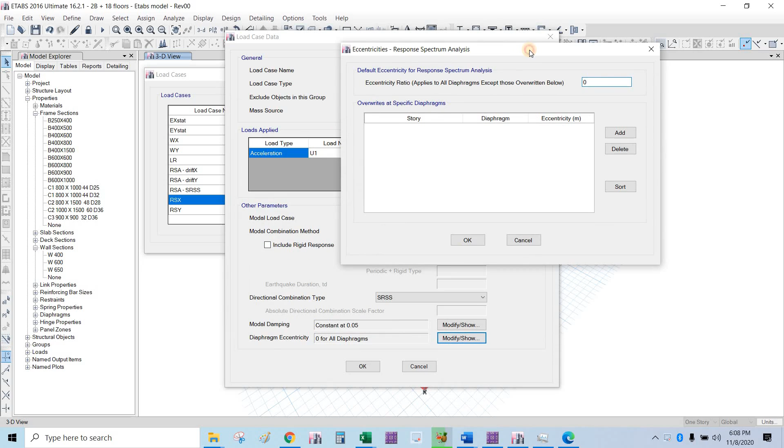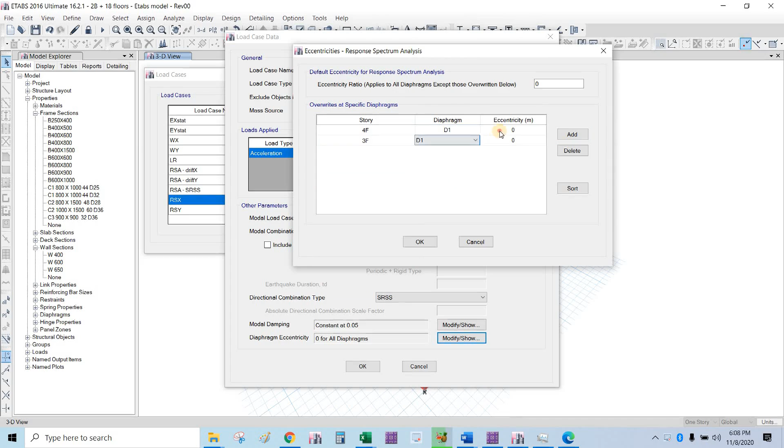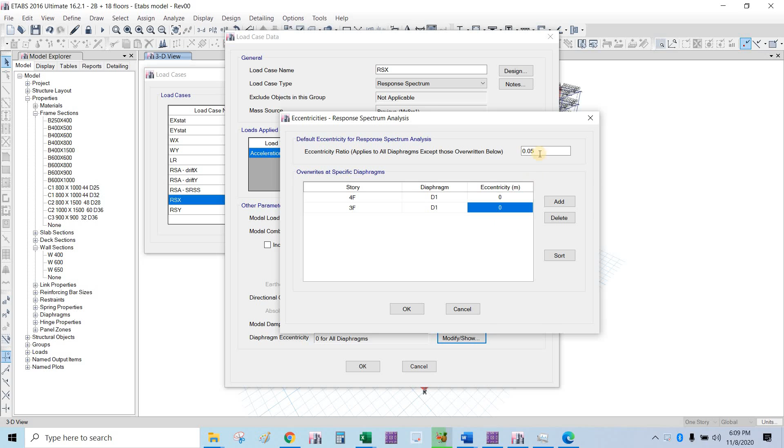So here we will put which floor, let's say 3rd floor to 4th floor, that's what we will amplify. So this is 0.05. Eccentricity ratio applies to all diaphragms except those overwritten below. So this is 5%. So if you have a value here, it means it's an exception, so the value becomes different.

For example, what I'll do here is the 3rd floor and 4th floor along X, just to show how it's done. So let's say this is 1.2 - torsional irregularity exists. Then let's say this is 1.21 - torsional irregularities exist here.

Then my AX needs to be more than 1 for this to be 5% above. Let's say here I'll make this 10. Let's say this is 21. More than 1 now. Then I already have a value here of 3.64.

This is the formula. Let's say this is small, 35 or 31. That's 5.9. So let's increase this more so the eccentricity at the 4th floor becomes bigger. Let's say 25, so 9%. Then this AX should not be more than 3.

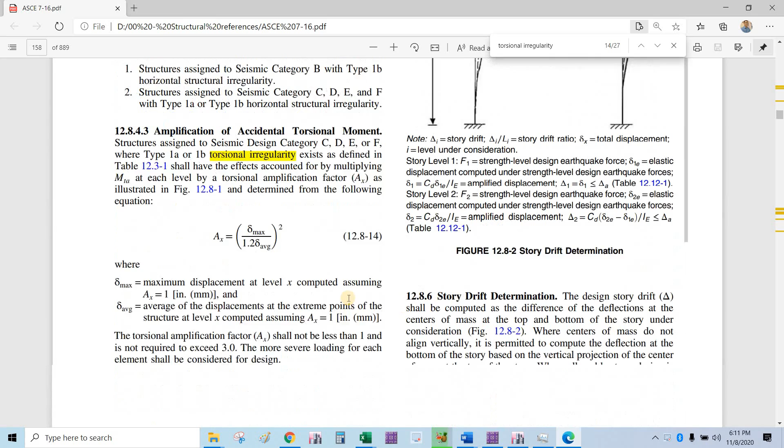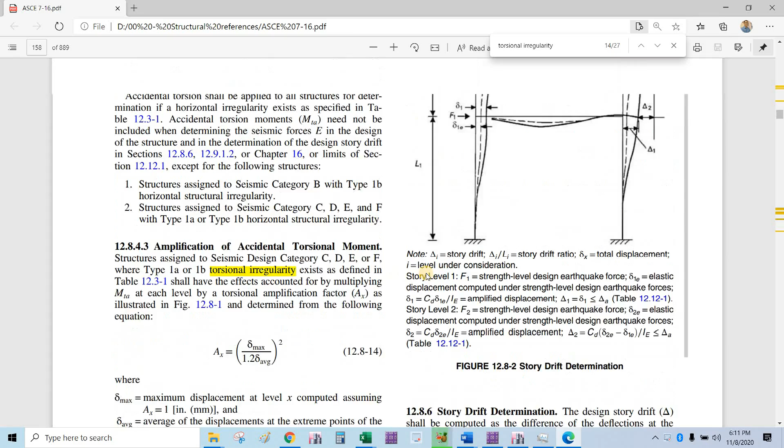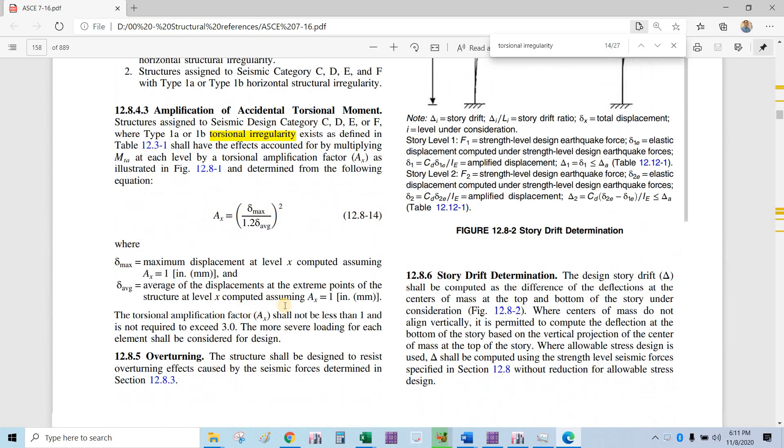Let's go here. AX is delta max or maximum displacement divided by 1.2 times average displacement of the deflection at both ends. But we are referring to the center of diaphragm, those are our values - displacement and maximum displacement and average displacement. We are considering the center of masses joints. So delta max is maximum displacement at level X, delta average is average displacement at the extreme point of the structure at level X, assuming AX equals 1.

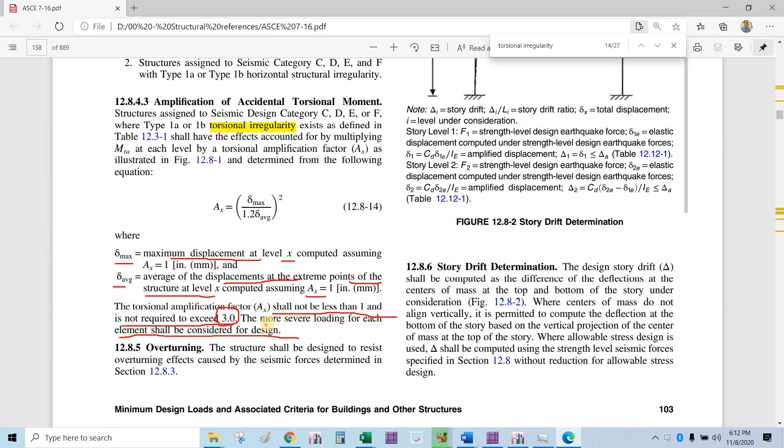So the torsional amplification factor AX shall not be less than 1 and not greater than 3. Because if it's already 3, the more severe loading in each element shall be considered for design. If it becomes 3 times, let's say I will override this, it becomes 5% plus, so 15% eccentricity now. So that's big. That's the limit, not more than 3.

Okay, so let's say we got a value here. We got torsional irregularity exists at RSX max. Then we will have 1.8 AX, this value. So now it's not 'not required' anymore, it's required now. This is in meters. This is our multiplier there.

Okay, so this value is simply 5% - 5% times building length perpendicular to RSX max. So that force is perpendicular. Then this Q24 of ours is AX. Okay, so it means 9% from the center of mass, we will shift the lateral forces by 9%.

9.07%. Okay, I hope that's clear. You shift it, then once shifted, you consider that in the lateral calculations, lateral distribution of the horizontal forces to the columns. Then it will have moment, and your design becomes correct because you considered it. If you don't consider it, you under-design.

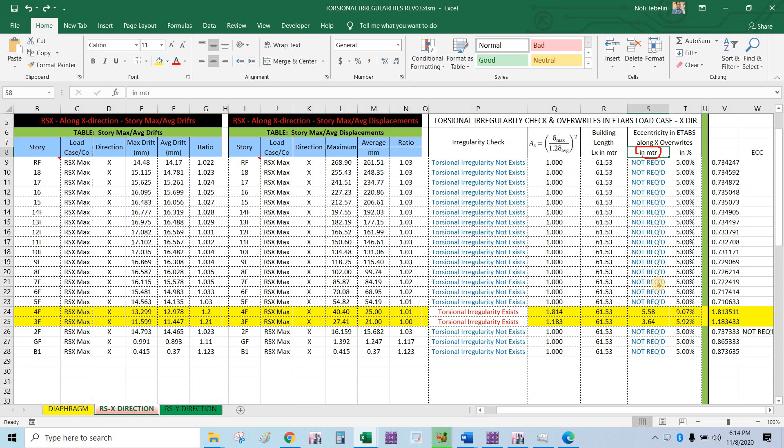Okay, so this is the input in ETABS. Let's say I'm at the third floor, 3.64 meters. That's it, 3.64 and 5.58. Let me go here - Define. So 3.64 and 5.58, so what I'll put here is 3.64 and 5.58. That's the overwrite of eccentricity for response spectrum analysis.